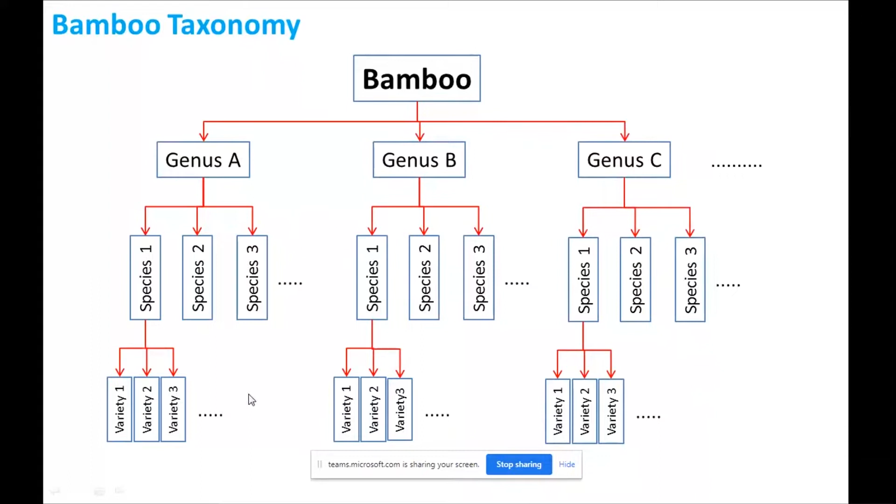About bamboo taxonomy, we start with bamboo, and after that we should say about the genus of the bamboo. After the genus, we should talk about the species of bamboo and the variety. For example, the family of bamboo is the Poaceae Gramineae. Genus can be Dendrocalamus, Phyllostachys, Bambusa, and many other genera that we have.

About the species, for genus Dendrocalamus, species can be Giganteus, Asper, Strictus, Latiflorus, and for Phyllostachys: Edulis, Aurea, Nigra, and many others.

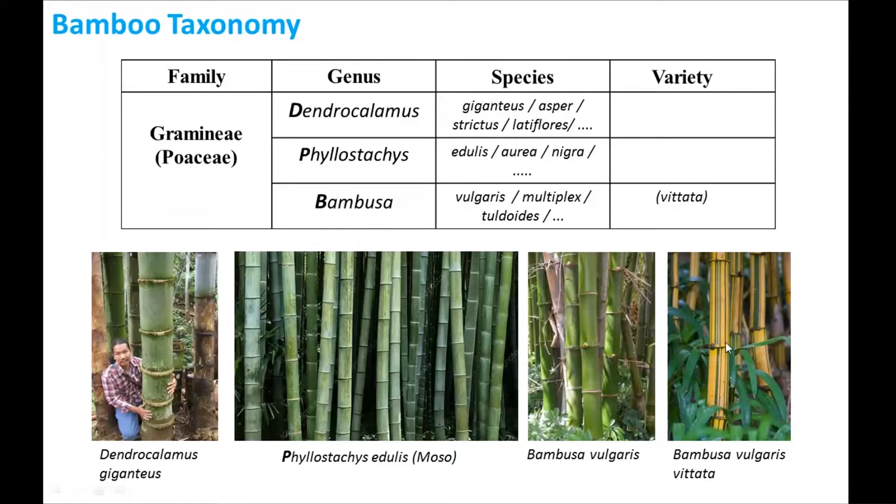For example, for the genus Bambusa, we have Vulgaris, Multiplex, Tuldoides, and many different species, and we have the variety Vittata. For example, we have Bambusa vulgaris, and exactly the same as Bambusa vulgaris, we have Bambusa vulgaris Vittata, because it has, in the yellow background, green lines like a barcode. It's a very beautiful bamboo.

About important specifications of bamboo: one of the most important is the high growth rate, in some species up to 1 meter per day. But normally it's not for all types of bamboo - only some species have this growth rate, and most of them grow about 20 to 30 centimeters per day.

The tensile strength of bamboo is comparable to steel, but the density is one-tenth. It's very important because it's a very light material, but the resistance is very high. The production cost is much lower than that of conventional materials, for example concrete and steel.

Propagation through the rhizome, as a root underground, propagates easily. You don't need cultivation - it automatically grows and grows without any problem. And it's prevention of soil erosion due to the formation of the roots and rhizome network that we have underground.

It's very good. Another good aspect of bamboo is the workability - you can use it and change it into many different shapes very easily with minimum tools and equipment.

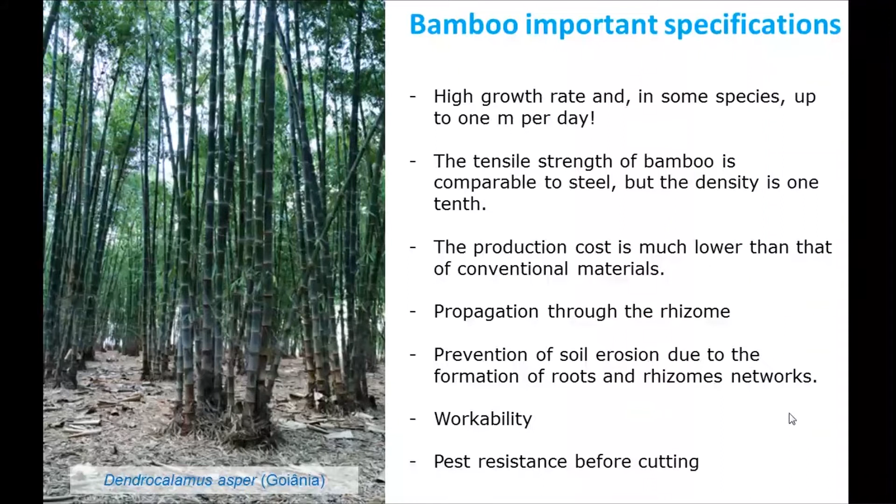Bamboo is a good material because it has pest resistance before cutting, but after cutting you need to preserve it and treat it against insects and fungus.

The good conditions for growing bamboo are normally tropical and subtropical zones, between 38 degrees north and south. You should consider there should be no severe cold and icy weather, because you cannot grow it in Finland or Norway, but you can grow it in the south of Europe without any problem. Also, acceptable relative humidity for this plant is more than 30 or 40%, which is good for bamboo.

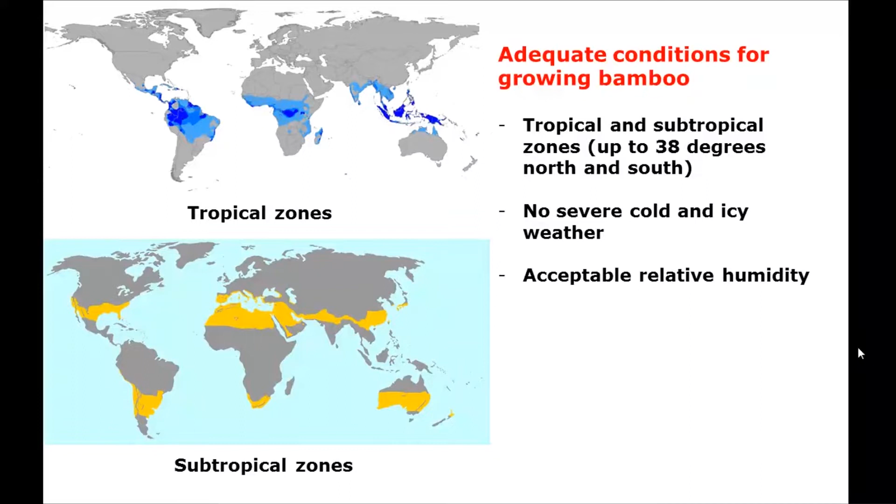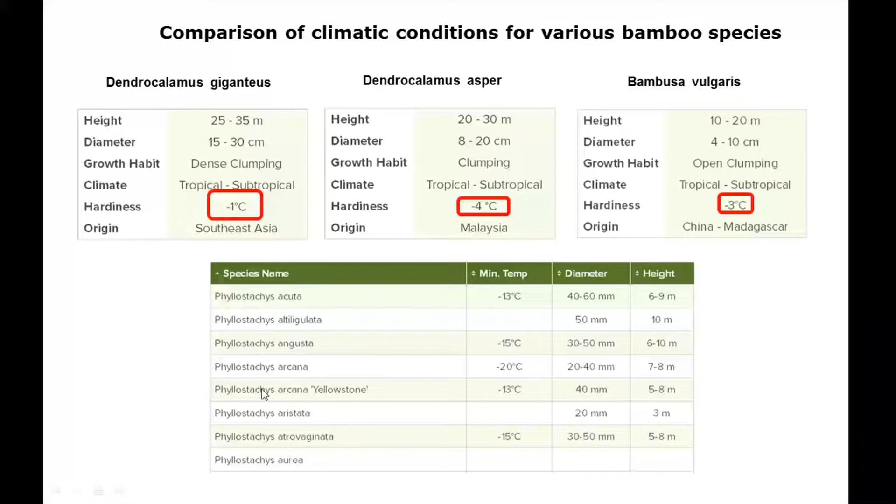Here you can compare the climatic conditions for various bamboo species. For example, Dendrocalamus giganteus: the height is about 25 to 35 meters, diameter between 15 to 30 centimeters, and the hardiness is -1 degree. For Dendrocalamus asper, it's -4, which is better and can tolerate cold weather. Bambusa vulgaris is -3. You can compare the size, diameter, height, and minimum temperature tolerance for different types of bamboo. We also have species tolerating up to -20 degrees, for example Phyllostachys arcana.

For distribution and diversity of bamboo in Asia, China has the highest diversity, followed by India, then Vietnam. Japan and Korea have bamboo too, with Japan's situation being better. Indonesia and Malaysia also have bamboo only in certain regions.

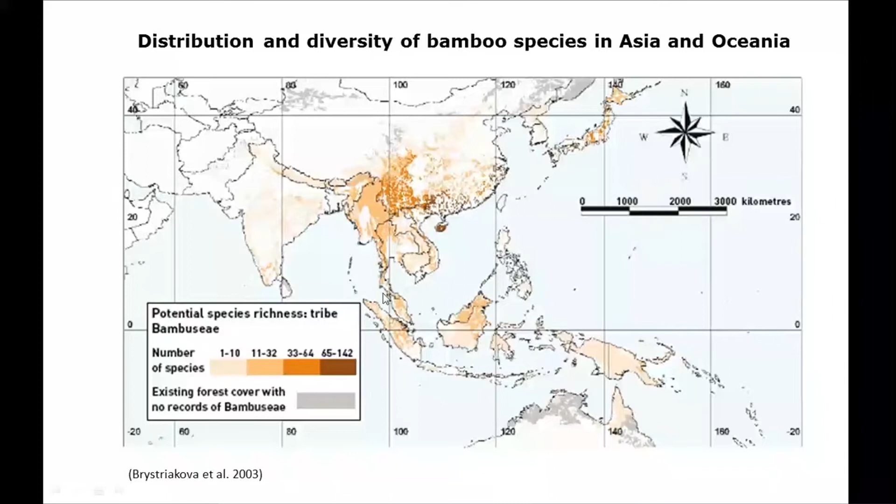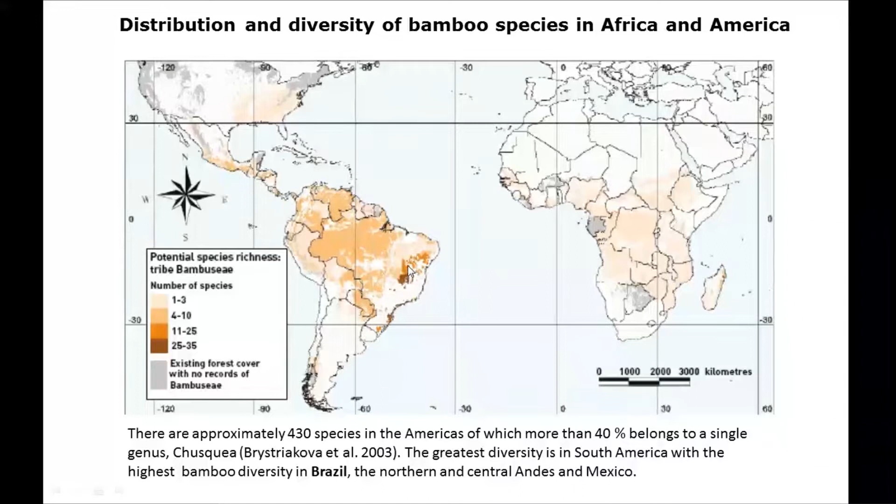In Africa and America, bamboo is more concentrated in South America. In this region where we are now, in Brazil, you can see the high diversity.

Now we talk about the bamboo structure and geometric features. We cut the bamboo here inside the university, taking a section of Dendrocalamus giganteus.

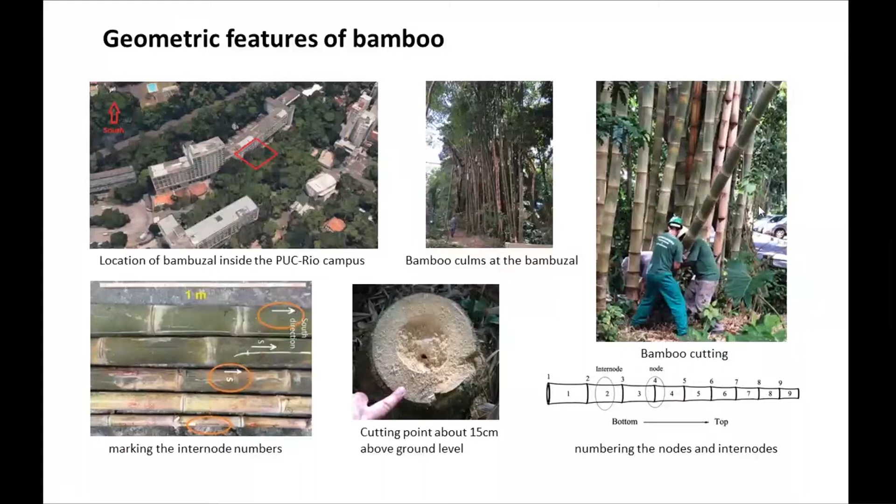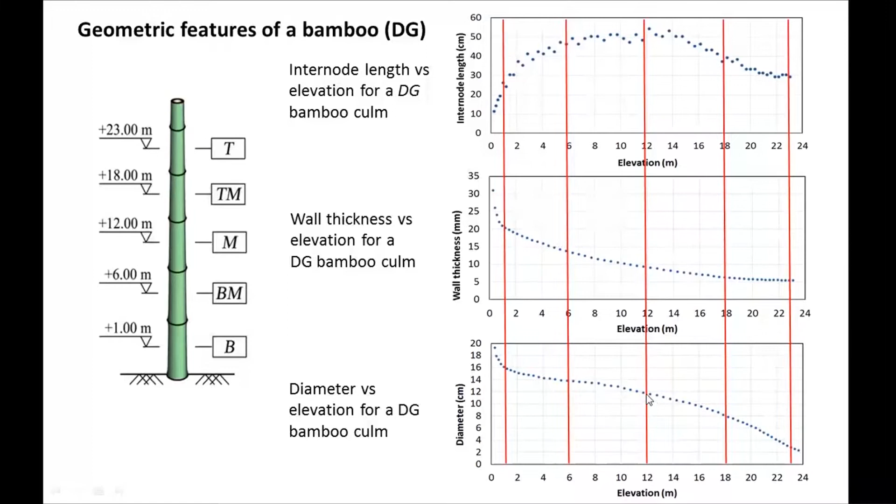After cutting, we measured all the dimensions: wall thickness, diameters, and the distance between the knots. For the results, the wall thickness started from 30 millimeters, averaging 2 centimeters, and at elevation 12 you can see about 10 millimeters. The distance between internodes is about 50 centimeters, and the diameter is about 12 centimeters.

For the meso and microstructure of bamboo, after cutting a bamboo section, you can see a bamboo segment. This segment has 3 parts: one is the matrix or parenchyma, a porous part, and another is the sclerenchyma or fibers, which are responsible for the resistance of the bamboo.

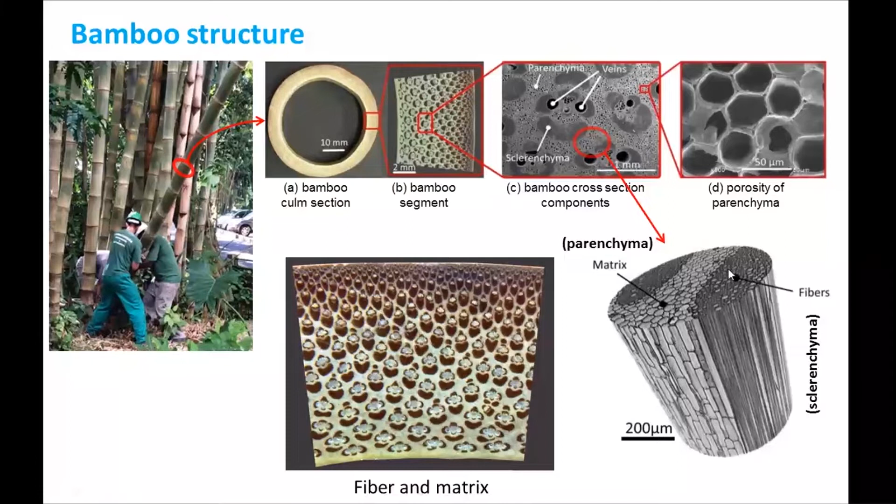We provided a tomography from a piece of bamboo, and you can see the porous matrix and the sclerenchyma or fibers, which are very dense, rigid, and solid. The matrix works only as a binder, exactly the same as reinforced concrete, where we have bars and a matrix which is concrete. The same happens in the cross section of bamboo: the fibers (sclerenchyma) are the bars, and the parenchyma acts as the matrix or binder. You can also see veins here, the hollow tubes for feeding the bamboo.

Here we can compare bamboo and wood. You can see the annual ring in wood, and you should consider that in a tree there is transverse growth, meaning each year the diameter of the tree becomes bigger and bigger. But for bamboo growth, it starts with its initial diameter. Comparing bamboo and wood, we can see the annual ring in wood, but we cannot see an annual ring in bamboo, and there is no transverse growth.

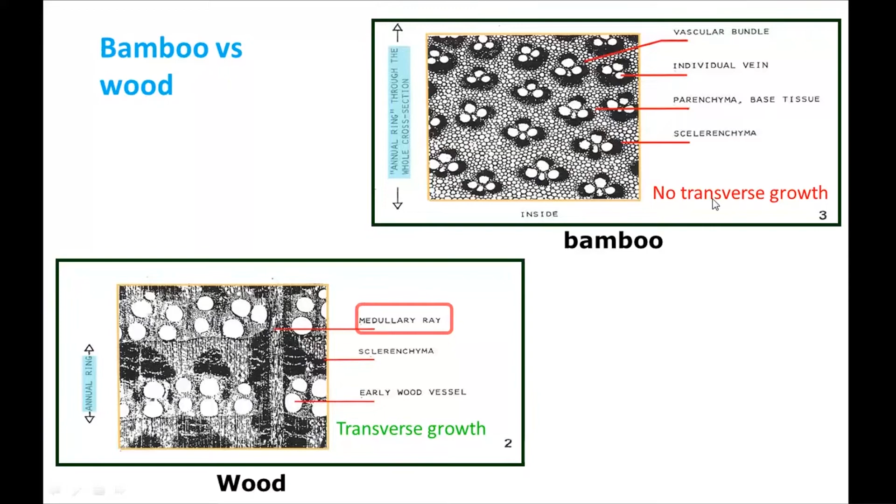You can see the Dendrocalamus giganteus and Phyllostachys edulis, and in the radial direction you can see the fibers. Here it's very dense, but in the bottom part of the bamboo, we don't have any density.

Here we can see exactly in the top of the bamboo, in the external wall, a high concentration of the fibers. In the lower or internal part of the bamboo, you can see matrix or parenchyma, and the density or concentration of the parenchyma is more. In Phyllostachys edulis also you can see the fibers and the matrix, with more density and concentration of fibers at the external part.

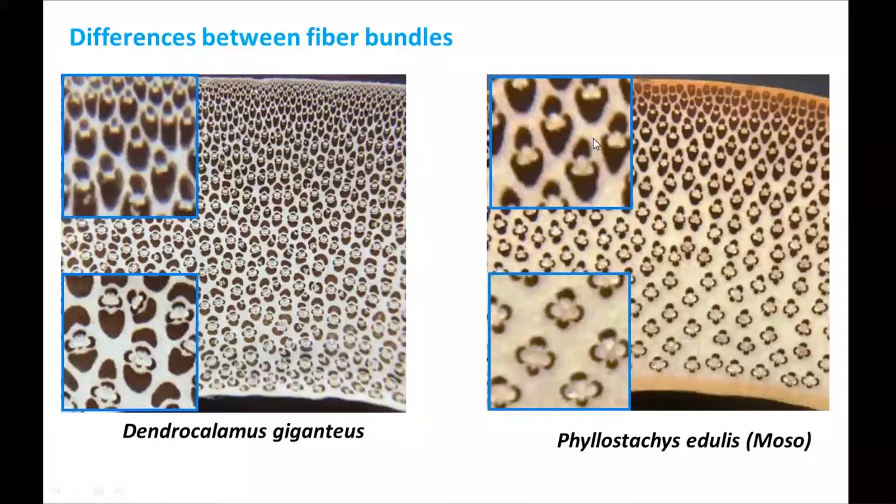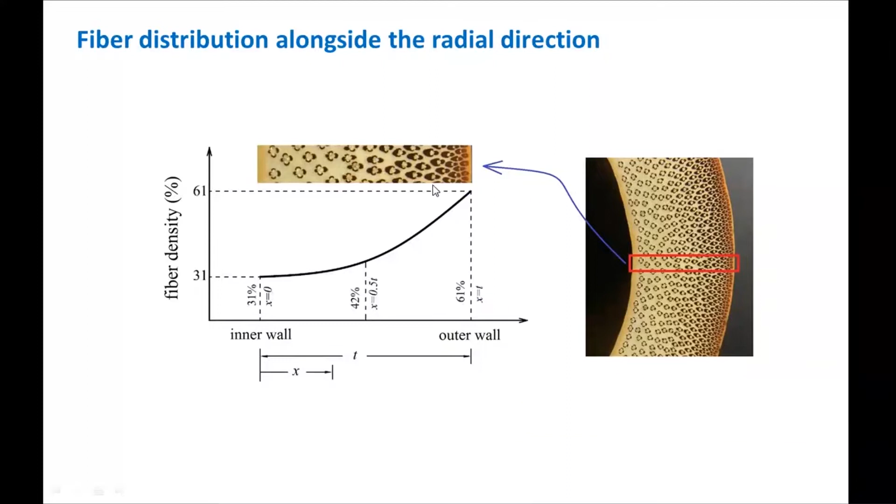You can see from the internal wall to the external wall that the most concentration is in the external wall, and the minimum concentration of fibers is in the inner wall. For example, 31% at the inner layer and 61% at the outer layer. This is a schematic graph presenting this. Yes, this is bamboo as a functionally graded material.

In a functionally graded material, or FGM, the property changes gradually with position. This is a gradual change from one component to another along a special direction, which you can see in the radial direction. Component A gradually becomes component B, and you can see exactly that happening here.

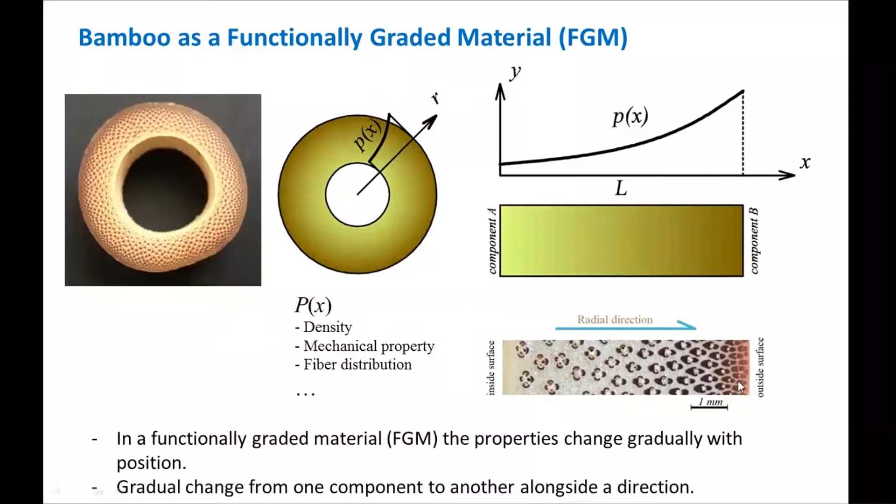You have more matrix here and less fiber, and here you can see more fibers and less matrix or parenchyma. The chemical components of bamboo are mainly cellulose, hemicellulose, lignin, and extractives.

The extractives are the aromas, resin, starch, oil, and many different substances that you can extract from the bamboo. You can maybe use some solvents like water, alcohol, or acetone or other materials to extract these aromas.

But extracting the lignin, hemicellulose, or cellulose needs other, more complicated chemical processes. And you should know about cellulose.

Cellulose has remarkable mechanical properties. The modulus of elasticity is about 120 or 140 gigapascals - it's excellent. That's the modulus of elasticity. And the ultimate tensile strength is about 1,000 megapascals, which is 2 or 3 times more than steel.

But hemicellulose is not as resistant as cellulose, and neither is lignin. The hemicellulose and lignin can only be used as a binder in the structure of the bamboo.

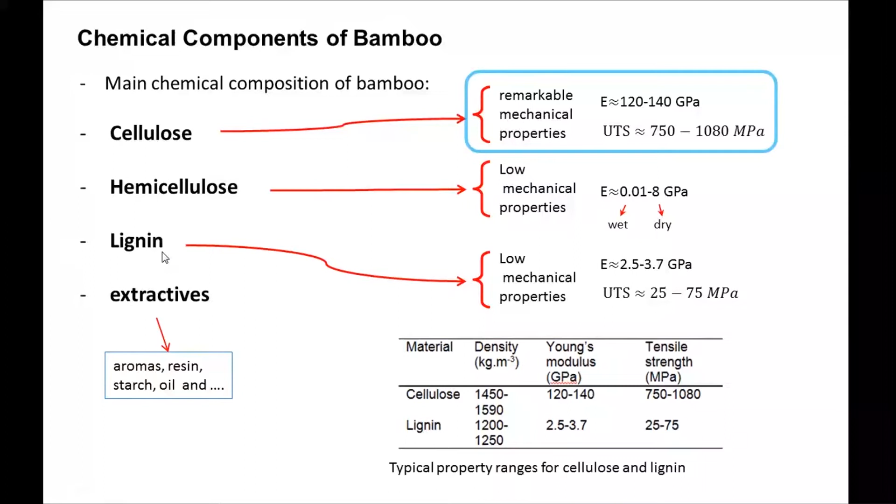We can compare bamboo with different types of hardwood and softwood. We have softwood, something like pine, and hardwood, for example maple - we also have balsa, maple, walnut, and eucalyptus. The only real difference you can see when comparing bamboo with hardwood and softwood is that bamboo is very close to hardwood. You can compare this because of the lignin component: it's between 13 and 29% for bamboo, and 15 up to 25% for hardwood. But softwood has much more lignin than hardwood and bamboo.

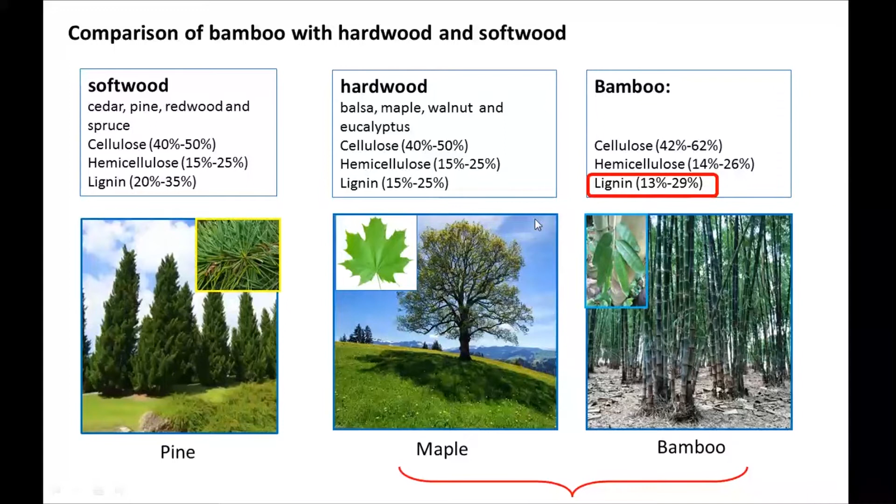In engineering, when you compare bamboo with other materials, four important materials used for construction are steel, concrete, wood, and bamboo. You can see that to produce 1 cubic meter of steel, you need about 1,500 megajoules of energy, but for bamboo it's only about 30 - a 50 times difference between producing steel and bamboo.

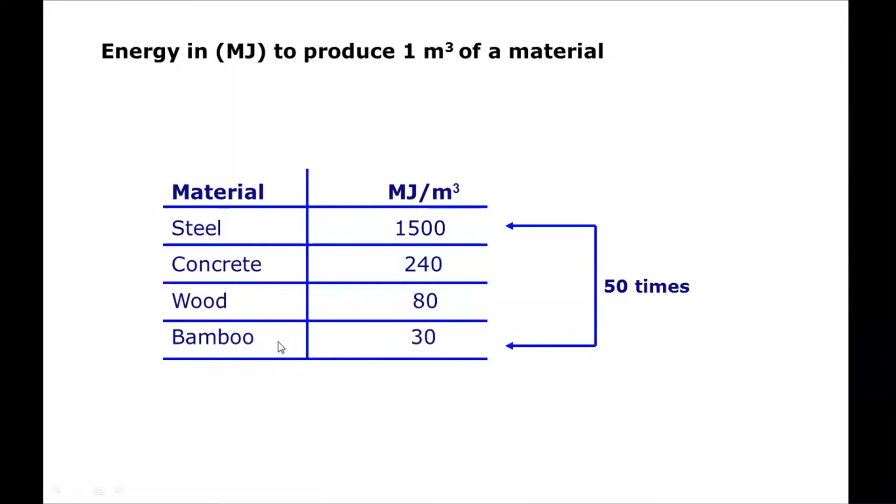For wood, the numbers are closer, but still, bamboo is better than wood.

If you want to compare the strength and resistance, the young modulus of some plant materials with bamboo, you can first see the cellulose here. The cellulose is in the best situation related to the young modulus, and related to the strength. We have lignin here, which is a poor situation because it has less young modulus and less strength.

We saw cellulose strength was about 1000 megapascal. You have these two strips here, showing that bamboo's young modulus varies between 6 gigapascal to 25 gigapascal on average. We have many different species of bamboo, so it can vary, but in average we can consider between 6 and 25 gigapascal. For strength, we can consider 60 megapascal up to 250 megapascal - 250 for the tensile test, and 60 for the compression test, which I will explain. You can see the good situation of bamboo compared to other types of wood in these regions.

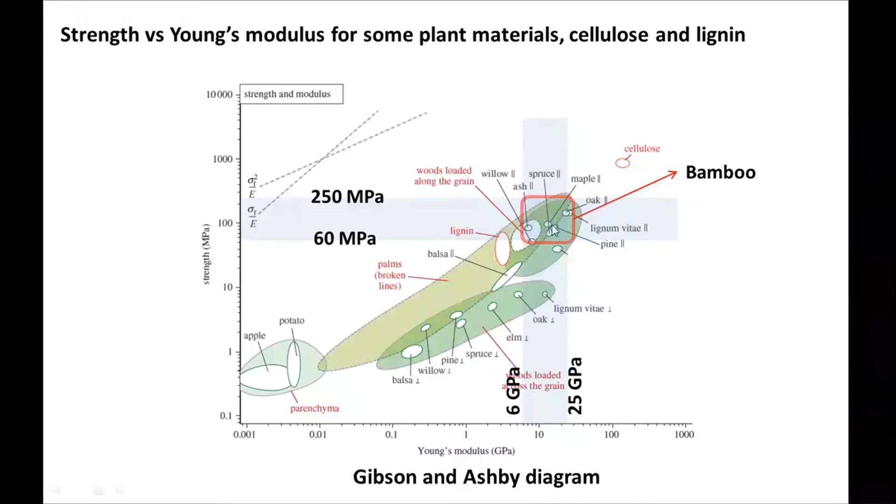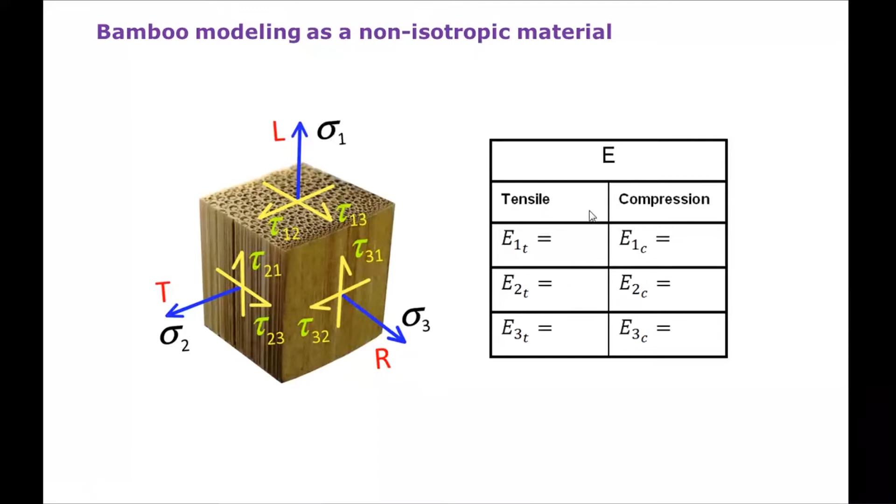If you want to model bamboo with software like Abaqus or ANSYS, you should consider that bamboo is not an isotropic material. It's a non-isotropic material, meaning you should consider different Poisson ratios and different modulus of elasticity in each direction - longitudinal, tangential, and radial. Also, the module of elasticity differs between tensile and compression. It's interesting, but very difficult to model bamboo with software considering all of these aspects.

Now we talk about engineered bamboo. We can use bamboo as a whole - for example, a bamboo column as a column of the structure, or as a beam, a member of the structure, the entire bamboo in fact. But you can also use some products made from the bamboo.

For example, you can make a laminate with undensified or densified bamboo. With glue, you can make a glue laminate, like the glue lamination we have for wood. You glue some laminate bamboos together, and with pressure or higher pressure, with or without densification, you get bamboo laminate used for flooring. You can also make bamboo strips, place them inside resin, and with compression and heat together, create a bamboo scrimber.

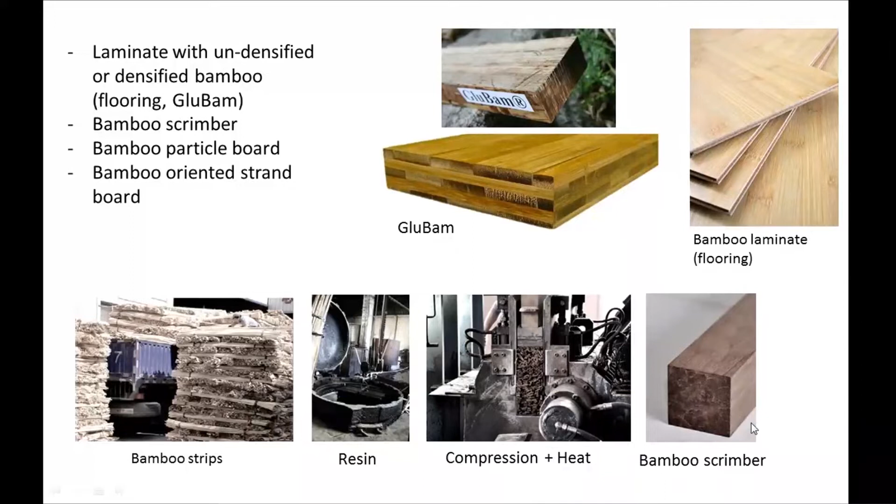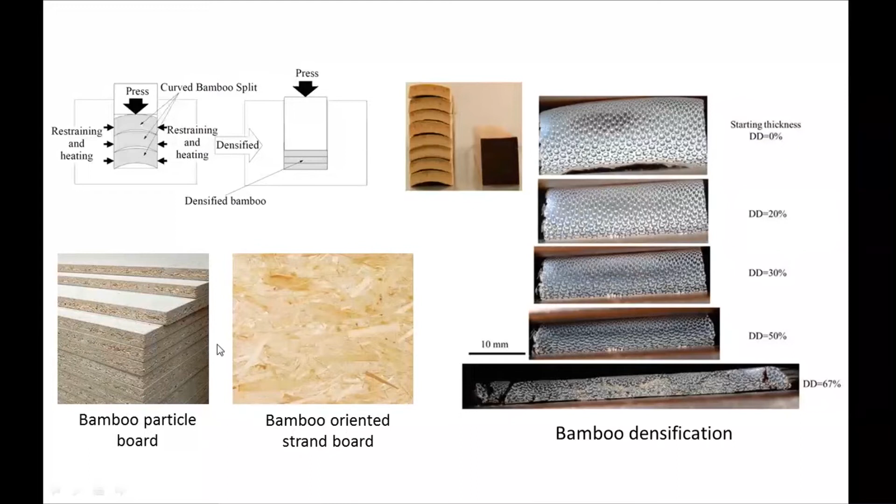You put pieces of bamboo together, and with pressure and heat, you densify it. This is a densification process - starting at 20% densification, then 30%, 50%, and finally up to 67%. As you remember, bamboo has a lot of porosity, and you can compress all of that porosity. You can also see bamboo particle board and bamboo oriented strand board - two other products made originally from bamboo.

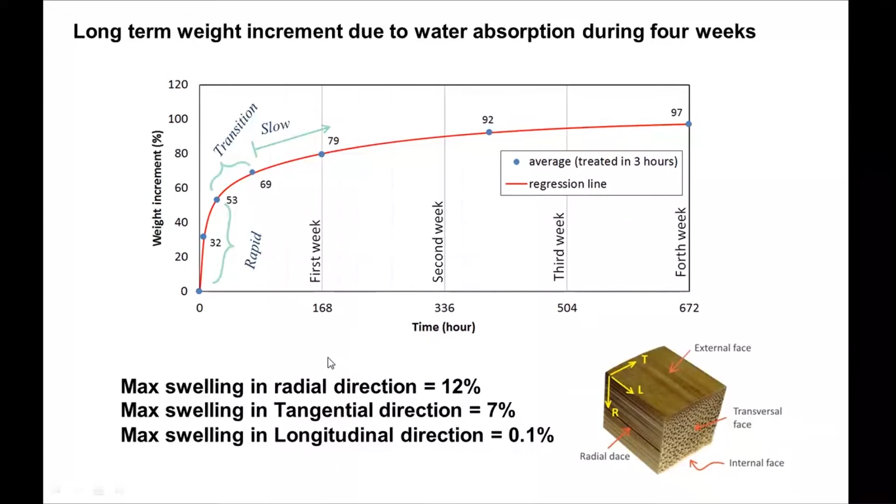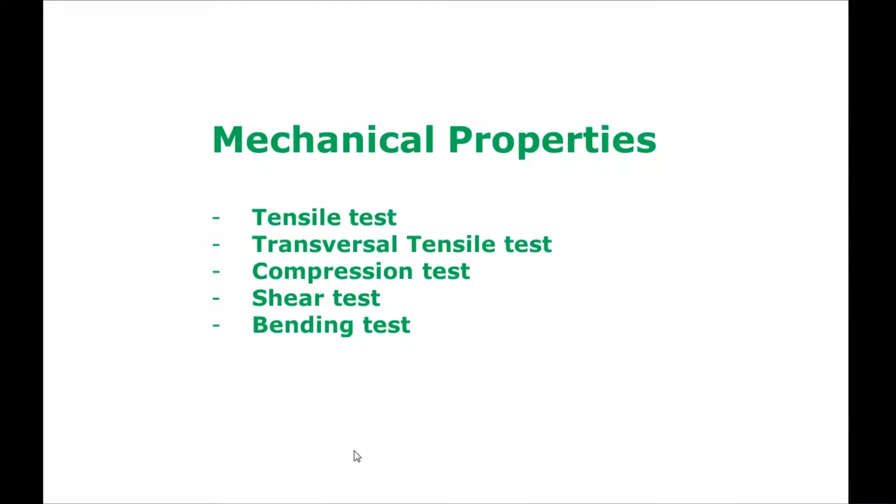About mechanical properties, we should talk about the tensile test, transversal tensile test, compression test, shear test, and bending test. In the tensile test we performed in the laboratory, we found that the ultimate tensile strength on average for bamboo is about 250 megapascals, though the exact values differ for T1, T2, T3 in each dimension, with the CV shown. The average E is about 22 gigapascal, and you can see the average and CV of this test - it's very close, a very low CV, which is very acceptable, meaning the test is very acceptable.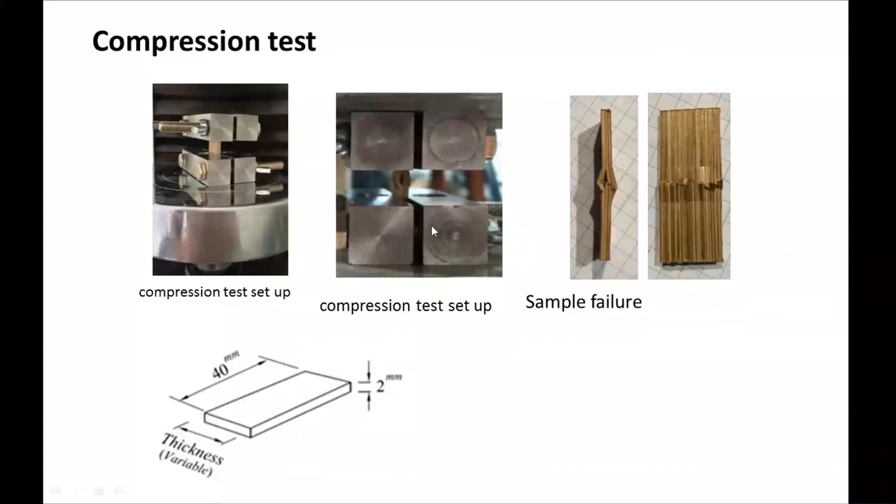In the compression test, dry and humid samples are totally different. For the humid samples at equilibrium moisture content of about 10%, you can see about 60 megapascal. But if you dry the sample, you can see 152 megapascal.

This can be justified due to the buckling of the fiber inside the matrix and the relation of the volume fraction of the fiber and the shear modulus of the matrix. You can see the effect of the modulus of elasticity of the matrix and the fiber, and the volume fraction of the fiber. With humidity, we have less EM, less EF, and less shear modulus of the matrix.

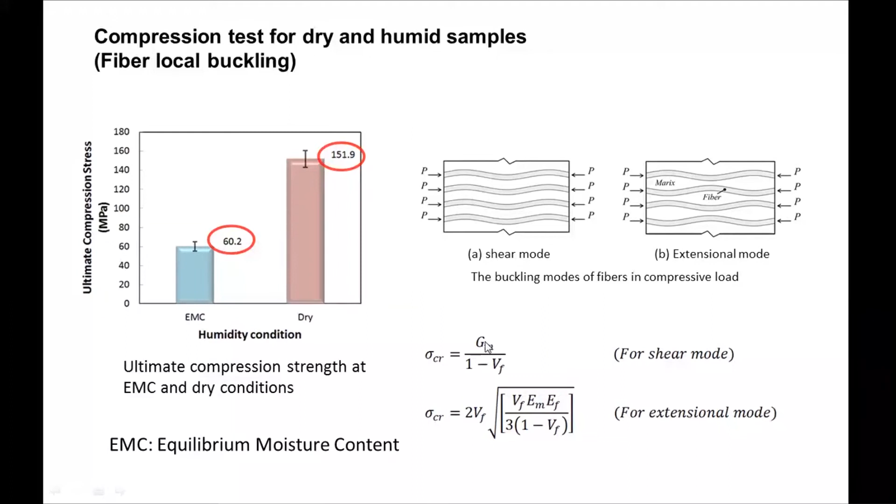The shear test normally can be done with different types. For example, we can use ASTM D143 for blocks of wood. It's very usual, it's the apparatus you can see, used everywhere for measuring the shear of wood blocks.

But as our geometry is very limited and we cannot make blocks of bamboo because of the limitation of the wall thickness, we use another method proposed by ISO 22157. You put the sample like that, with 2x here and x here, and you can have 4 shear surfaces in 4 different locations to measure the shear resistance of the bamboo.

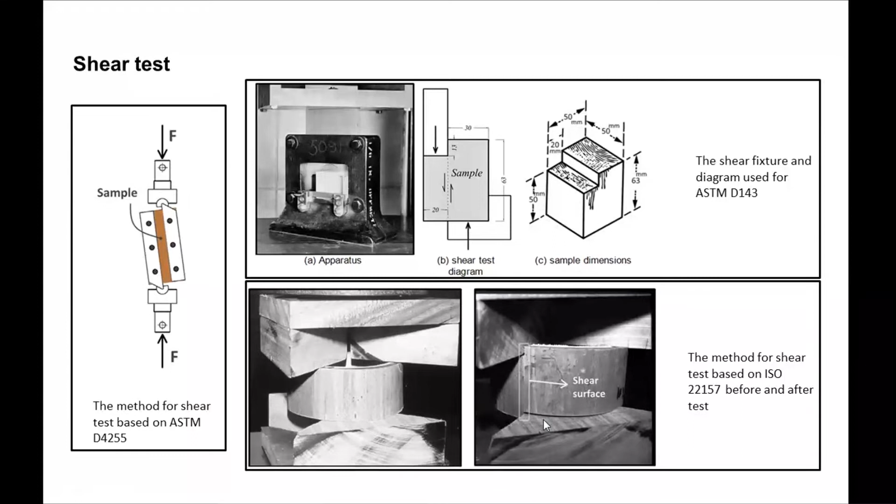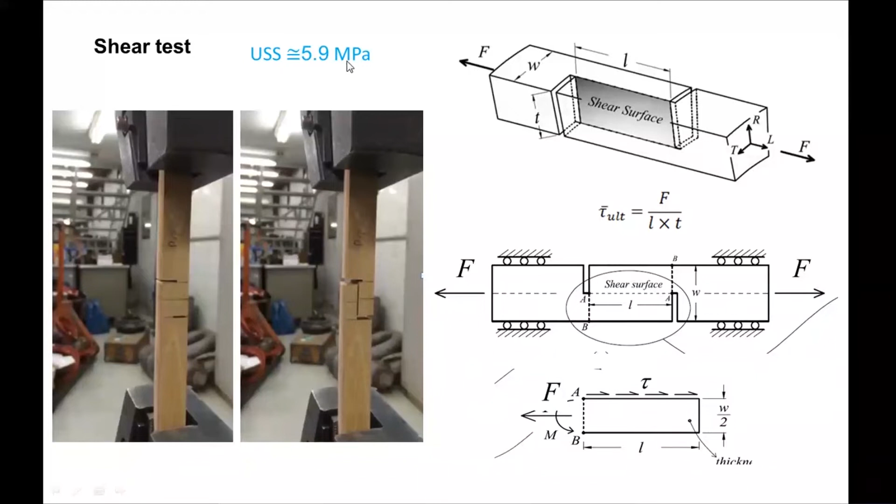We propose another way, using 2 notches here and here, giving us a shear surface here. With this shear test, we can realize 5.9 megapascal for these samples.

We have a 4-point bending test, and we can understand that the modulus of elasticity is about 20 gigapascal. You can see the failure shapes of the samples with low wall thickness and with high wall thickness. We can see shear failure happen for the samples, with different types of failures.

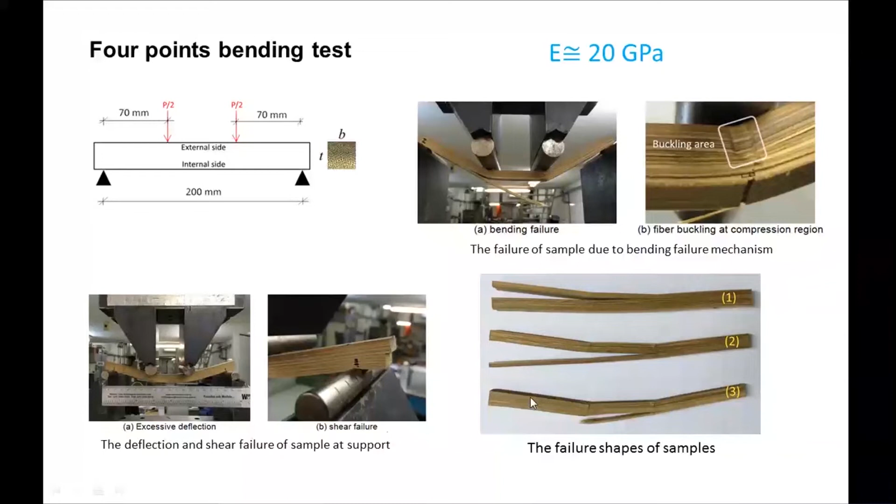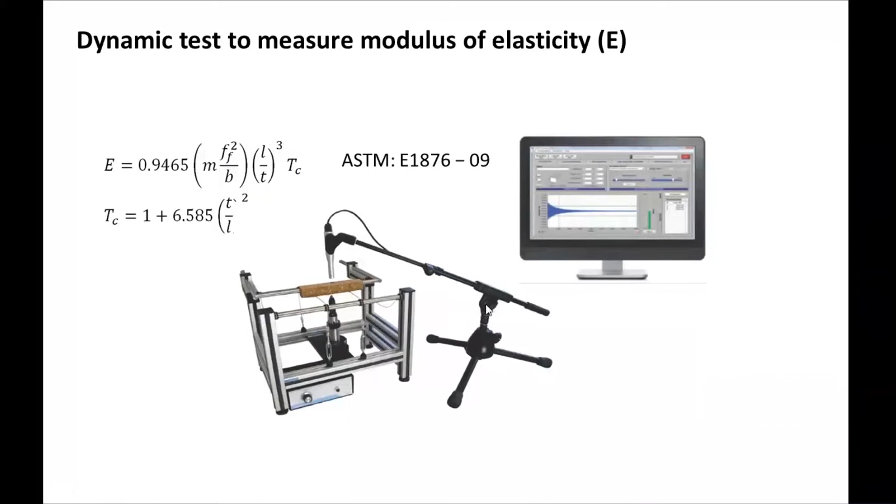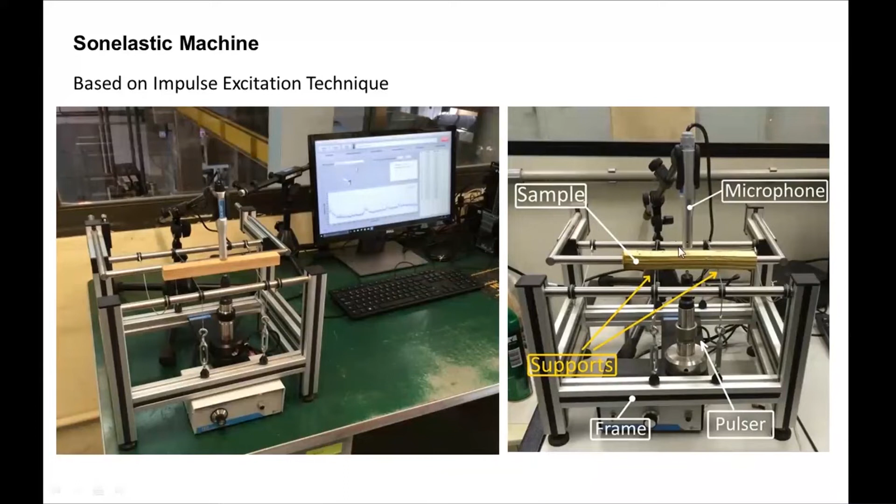We can also use the dynamic test to measure the modulus of elasticity. It's a Sonelastic equipment made in Brazil, developed with a professor here, used to measure the mechanical modulus of elasticity based on the impulse excitation technique. The sample vibrates, the sound produced by the sample is recorded by the microphone, and after analysis, you can understand the mechanical property of the sample.

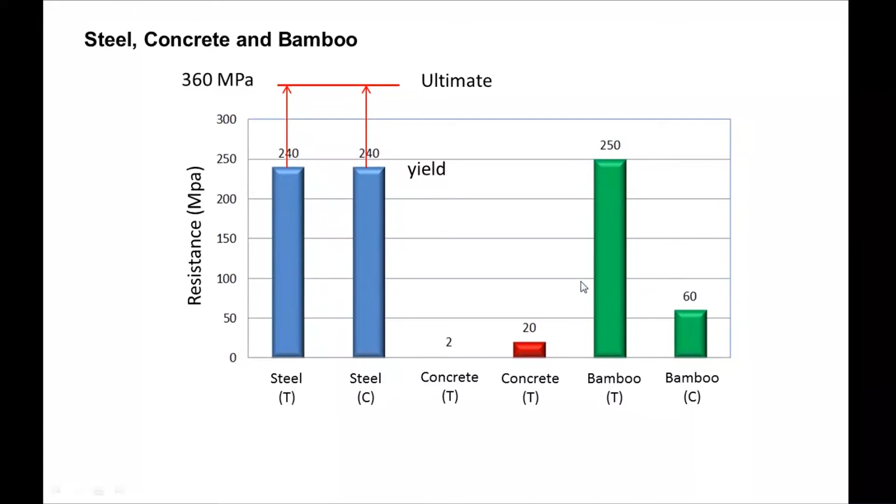If you want to compare steel, concrete, and bamboo rapidly in one graph, you can understand that for steel, tensile and compression are equal. For steel used in construction, it's 240 megapascal, and the ultimate is 360 megapascal. For concrete tensile, it's very, very low; for concrete compression, it's 20. For bamboo tensile, we have 250, and for bamboo compression it's about 60. It's a relatively good situation compared to concrete and steel.

Bamboo protection: we have two main different bamboo protection methods. One is heat treatment with direct flame. By using the flame, you can burn the starch and sugar inside the bamboo, because the starch amount in bamboo is relatively high, and by caramelizing this sugar, you can protect it easily.

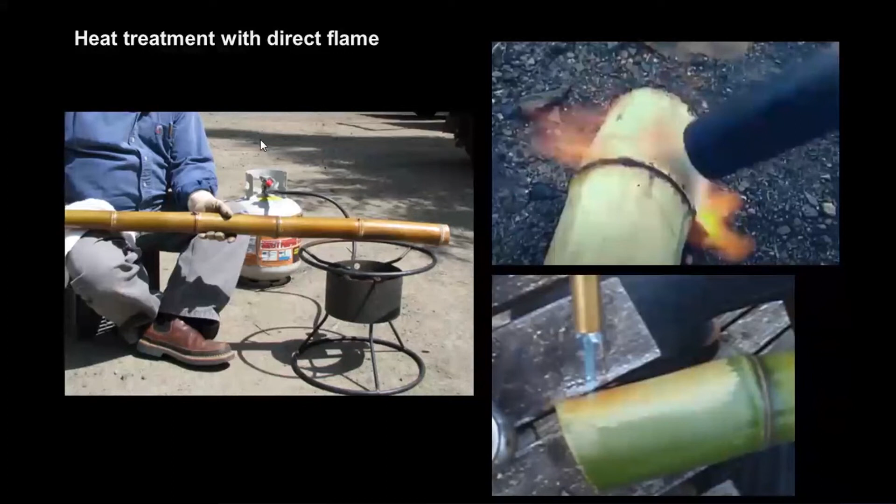The other way is using chemical treatment, immersion in chemical solutions like DOT, or disodium octaborate tetrahydrate solution, which is a mixture of borax and boric acid in special proportions. You can immerse it for 1 week, and after drying, you can use it easily without any problem from insects or other attacks.

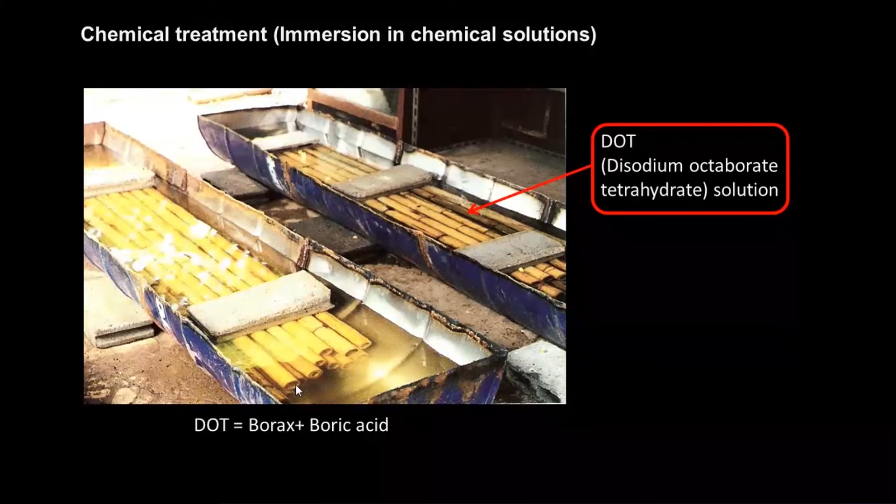Now we talk about the bamboo connections. The world of the bamboo connections is very diverse, because we have many different bamboo connections in the world. Every person uses some and maybe invents a new way to connect bamboo.

And we have another connection here with bars and metal anchor, and the technique. We use different positions, vertical and horizontal, and we can fasten the screw and tighten the two parts of bamboo.

We can join two bamboo with two belts and nut and bolts here, and you can fill here with, for example, a matrix, something like light concrete, and use two straps or belts and nut and bolt to fasten different parts of bamboo as a column or beam or everything.

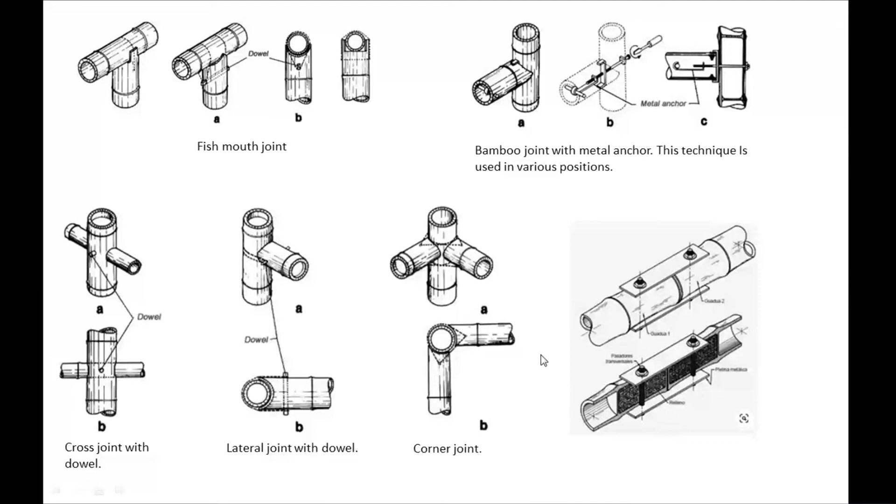We can use some ropes for fastening the bamboo, and you can see here a space truss with some particles, some steel bars and something like that.

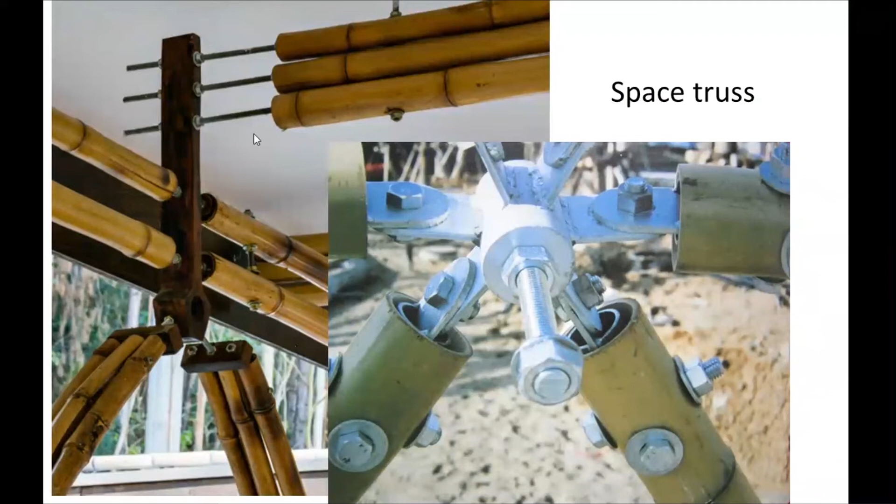And you can see the bamboo joints with steel clamps. It's capable of transmitting moment, and you can see here exactly that you have steel clamps, and this part is used for rigidifying this part.

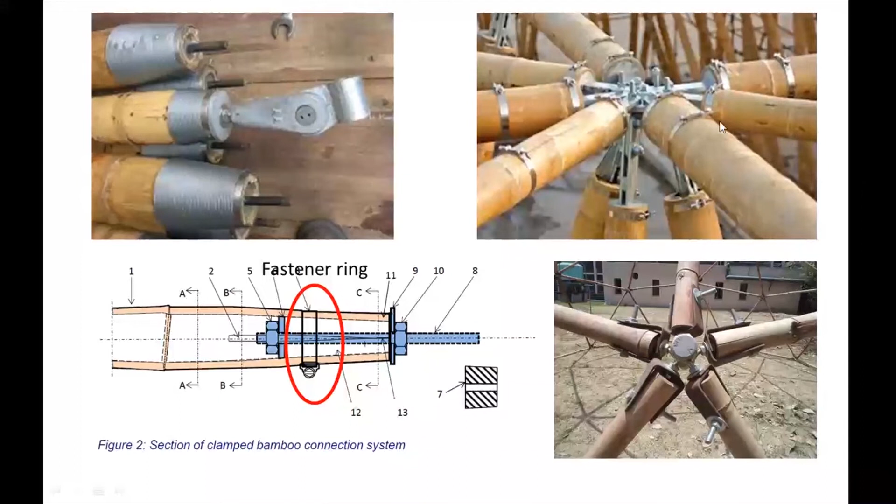We have another type of fastener ring, and it's a bar with a pulley here, and it's a detail for fastening different types of columns or other things together.

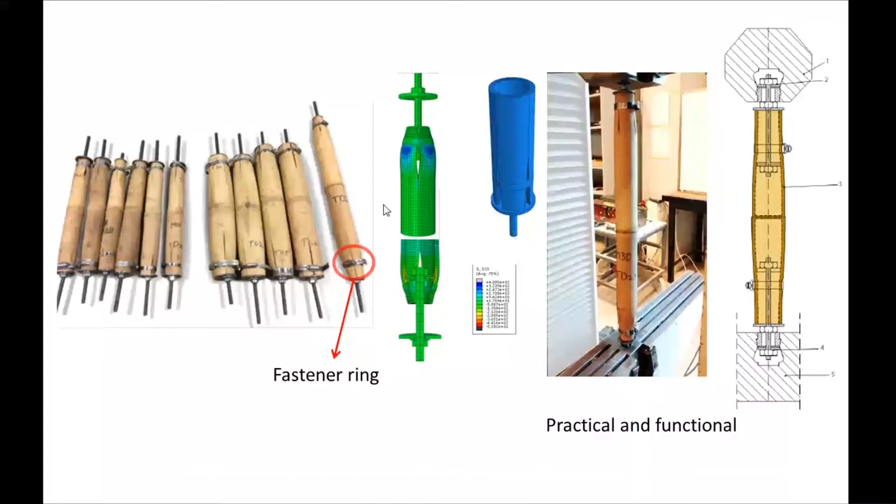You can see here many details, and you can find in the internet many different types of bamboo connections.

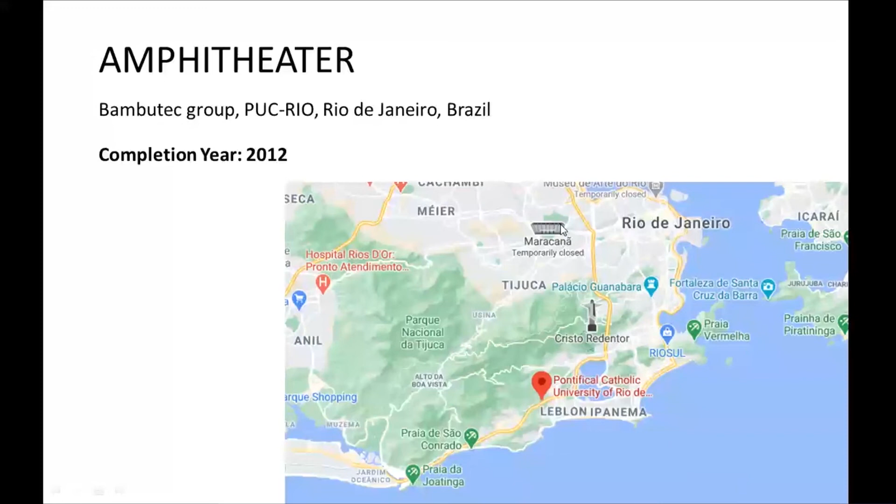Here, and you can see the Cristo aqui, Maracana. It's a very nice city, very beautiful city, Rio de Janeiro.

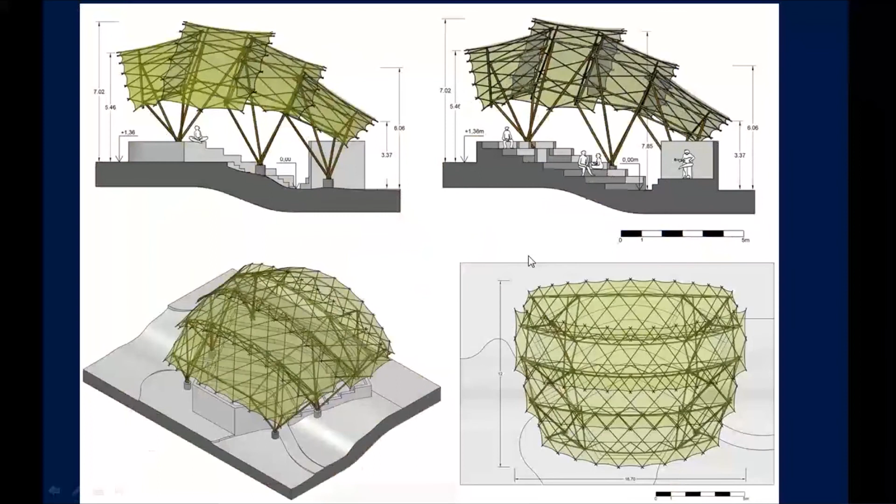You can see the schematic design of the amphitheater here, and finally you can see it in a real situation.

You can see the connections, you can see the size of this structure, and also on the right side you can see the bamboo, Bambusa vulgaris, that we have many of in Rio de Janeiro.

The inside part of this structure, and you can see the connections here. All of the connections use rope for fastening the bamboo together.

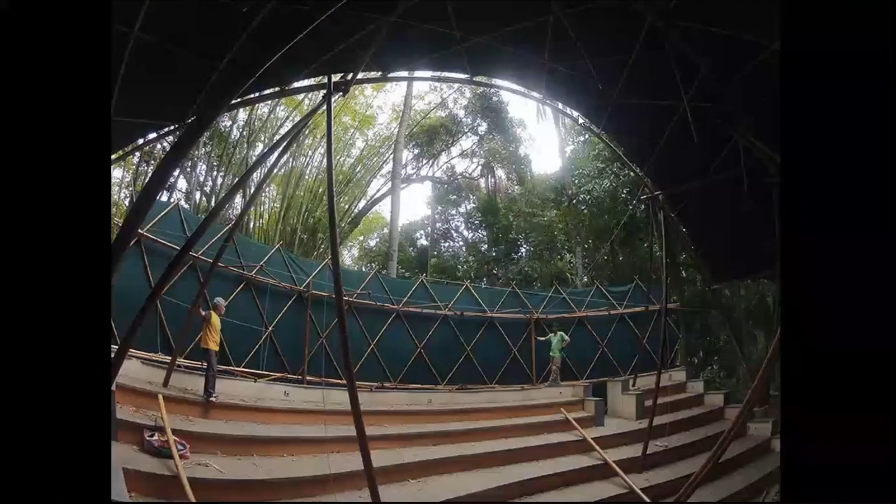You should consider that they also use steel cables here for the tension parts, because it's compression and tension. The role of the bamboo here is mostly in compression, and the columns are in compression. For the tension, they use the steel cable, a mixture of steel cables and bamboo. You can see it with more details here.

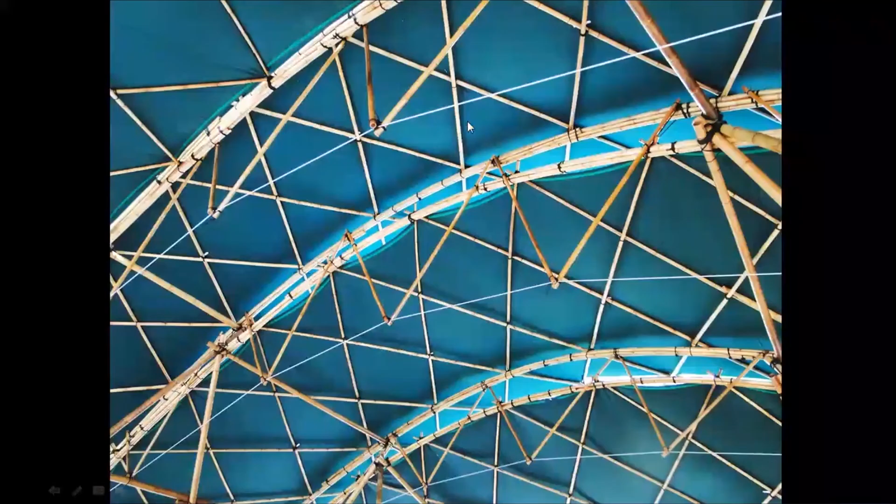Another frame is very close, I don't want to repeat, because it's another work by the Bambutec Group. They used two different types of bamboo, Phyllostachys aurea and Phyllostachys edulis, or moso bamboo.

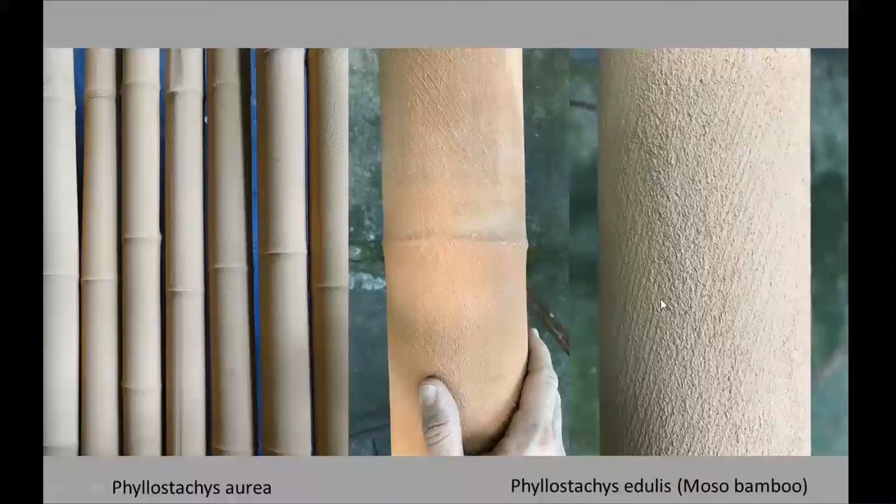Moso bamboo has a diameter larger than Phyllostachys aurea. Aurea is used for the subsidiary or secondary elements, and for the principal or initial elements, they use Phyllostachys edulis. It's from the Bambutec Group, and it's the Bambutec site.

You can go there and see other structures made by them. It's a group, a very nice group, with Mario Seixas, my best friend.

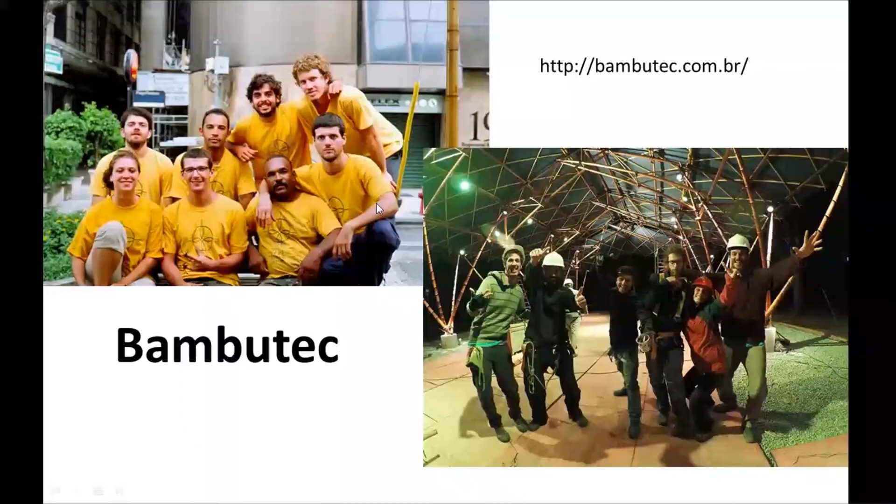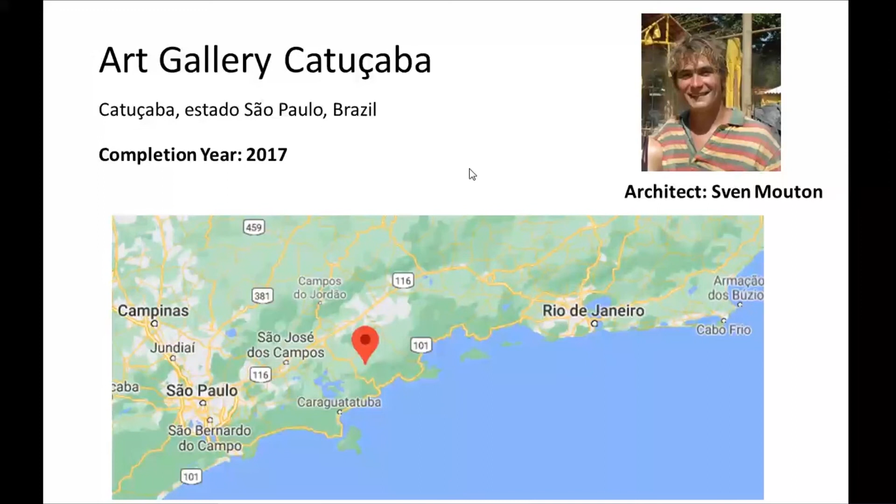You can see the art gallery made by architect Sven Mouton from Belgium, but he worked in Brazil many times. He traveled and stayed here in Brazil and made many different bamboo structures that I will present two of. One is the bamboo gallery, which is very beautifully designed, and you can see the design.

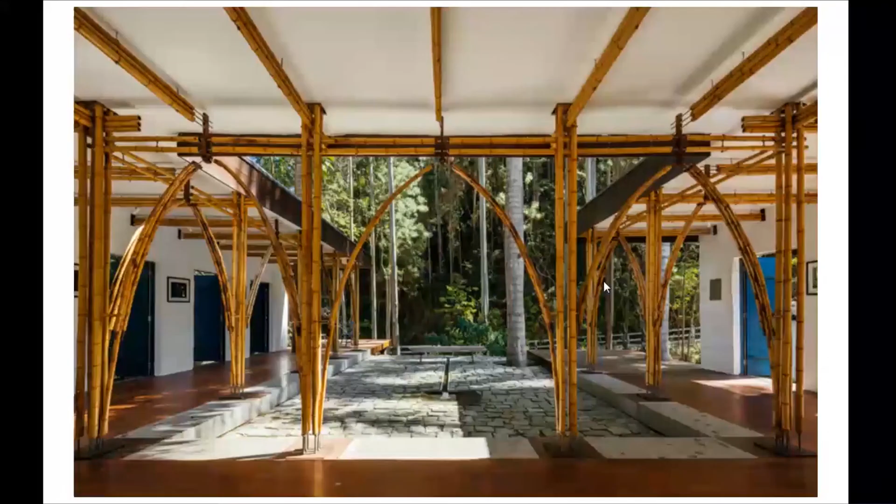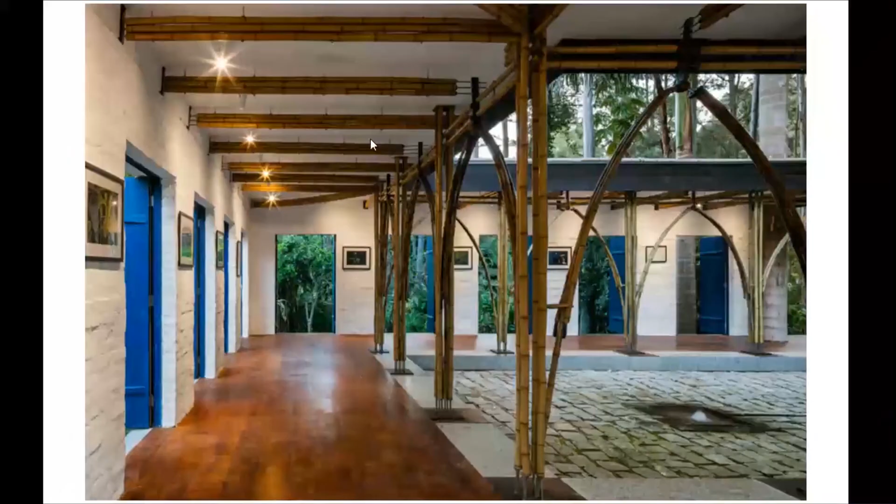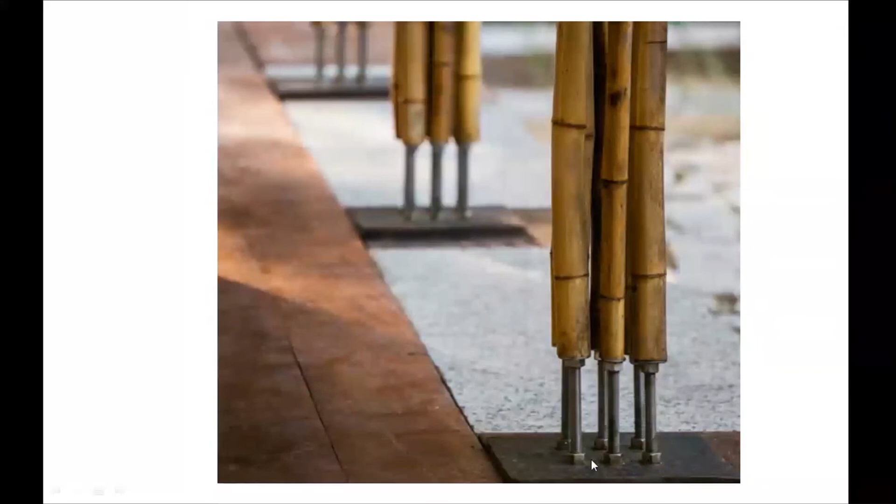And you can see the foundation, this plate, and it's a good idea because it's not directly in contact with soil, because it's better suggested that you don't put bamboo directly in the soil because of the degradation of the bamboo.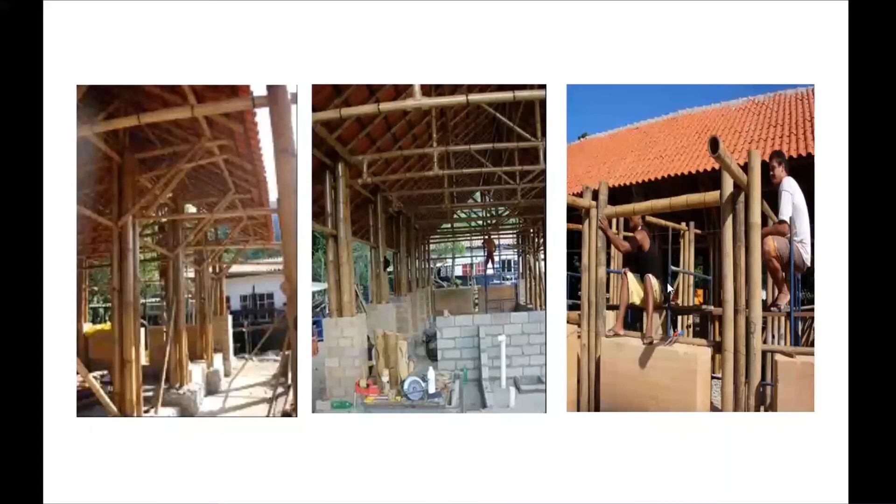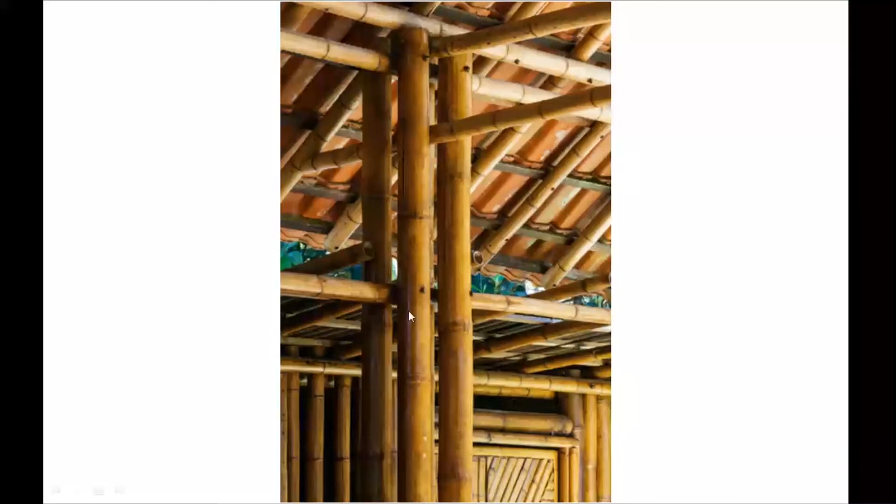And you can see the structure of bamboo here, and the columns. Most of the bamboo here is used as columns. Each group of columns has 4 bamboo.

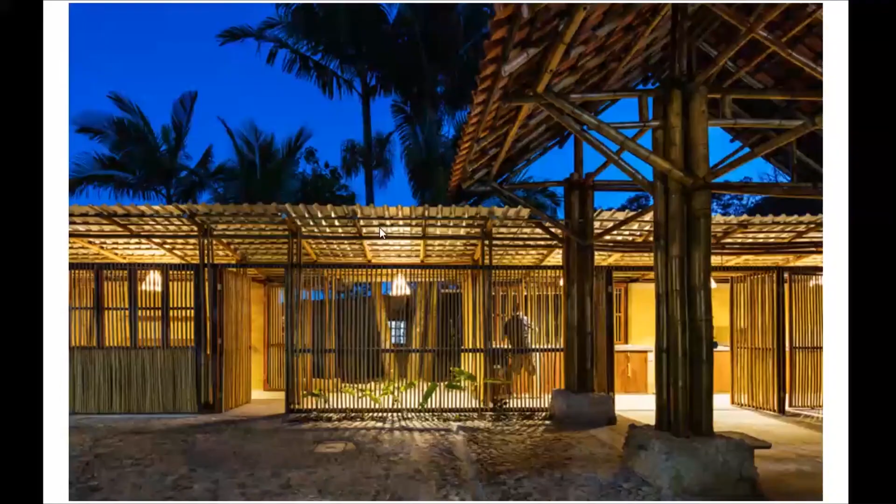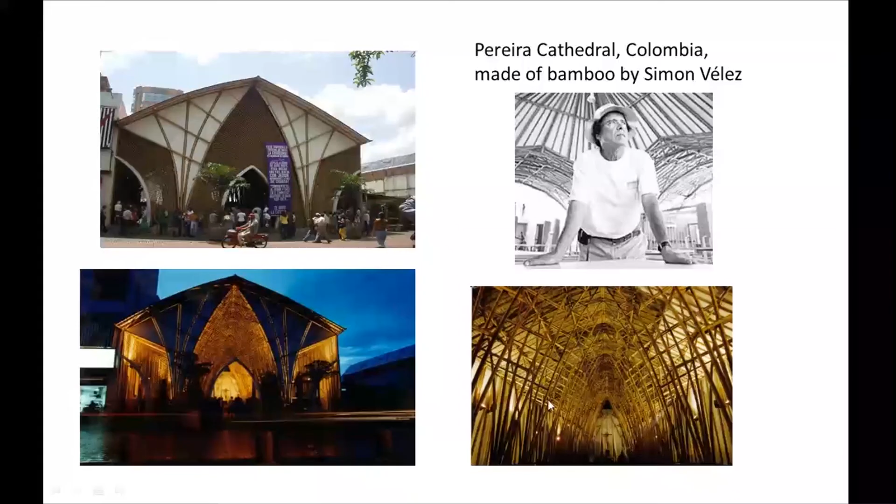Another example, from Colombia, designed by Maestro Simon Vélez, a great architect who designed, for example, the Pereira Cathedral in Colombia. You can see the very beautiful and nice structure here inside. Very nice and very beautiful.

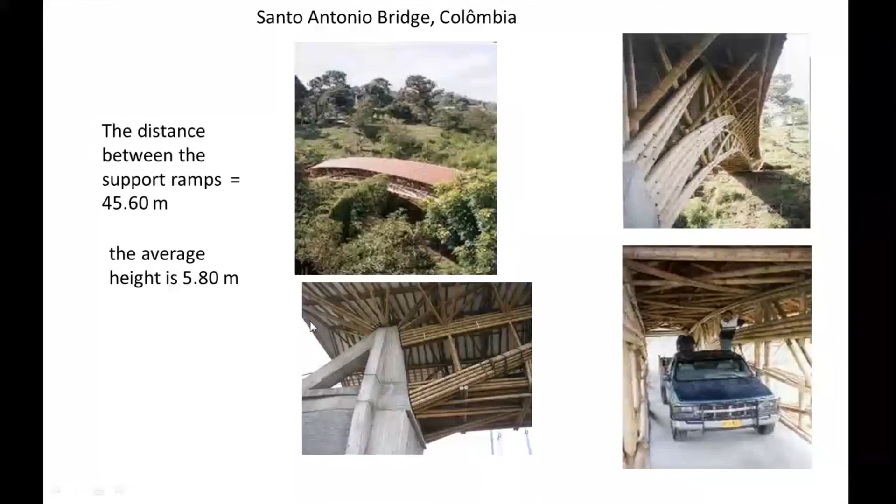Another type of design, very interesting, with the bamboo in the jungle. You can see different types of design here also.

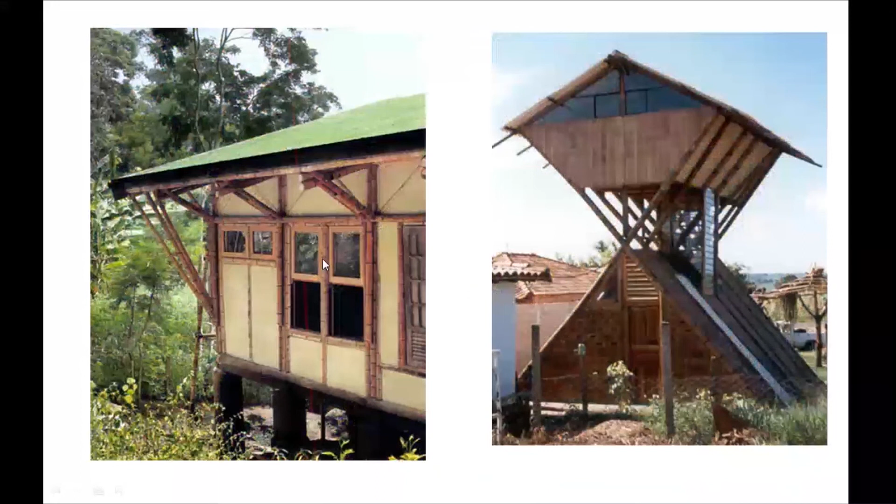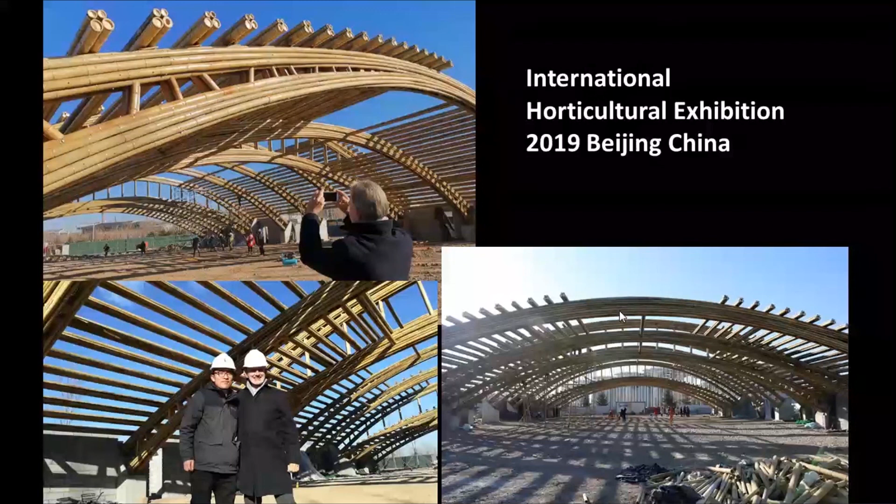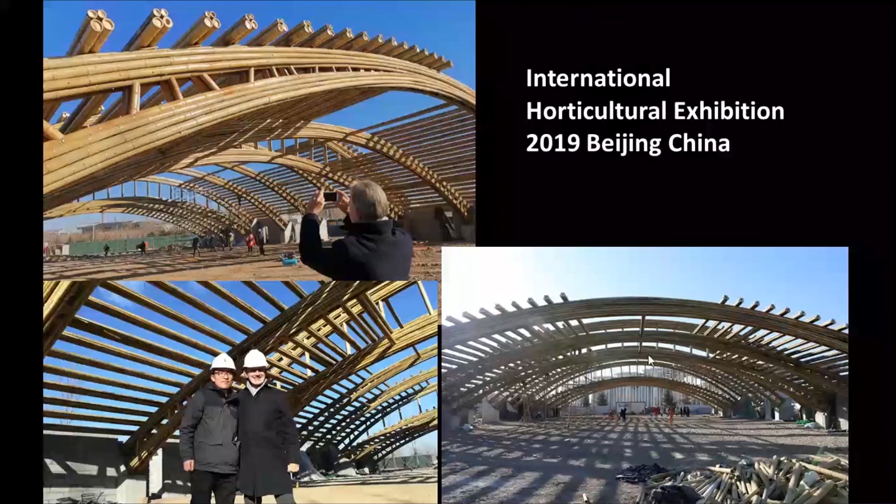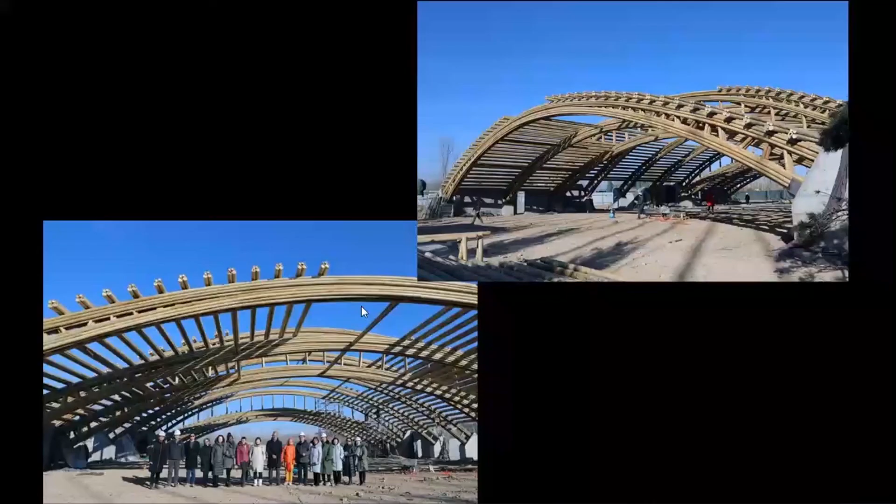One of the most interesting things I found about bamboo structures was the International Horticultural Exhibition in Beijing, China, which uses exactly the same philosophy for the structure. You can see the compression exactly - these arcs are in compression, and they use pads here and here, supported here, and after, you can see the final result. That's very nice.

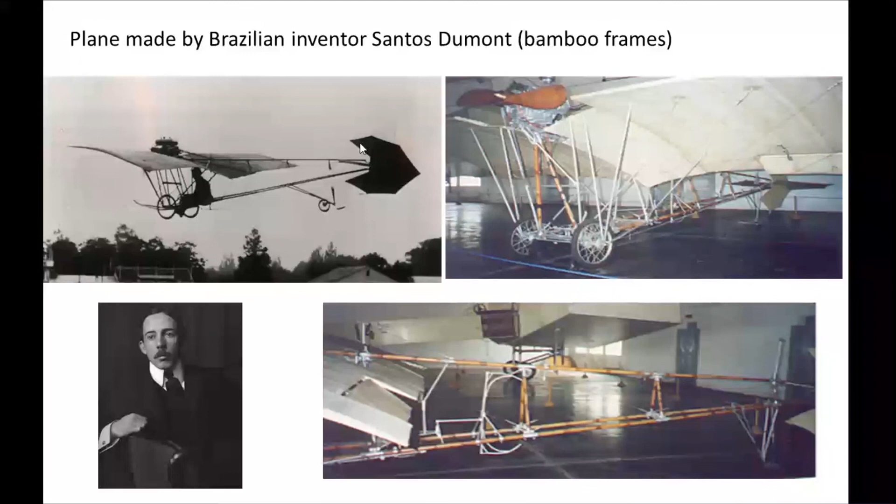Bamboo is edible and is very delicious. I personally prepare bamboo shoots for myself, for family, for friends, and you can use it. It's very delicious, and you can make many different dishes with bamboo shoots. You can vaporize it, or make something like bamboo fries, for example, and many different things.

Bamboo is also used in the cosmetic industry, and you can see the extractives of bamboo used for many different cosmetic things, shampoo, soap, something like that.

Also, bamboo is used in handicrafts. The Chinese and Japanese are very famous for this, and you can find different handicrafts from Japan, China, Korea, and Thailand, and different parts of Far East Asia, in fact. These are very nice and beautiful, and we also have many beautiful handicrafts in Brazil.

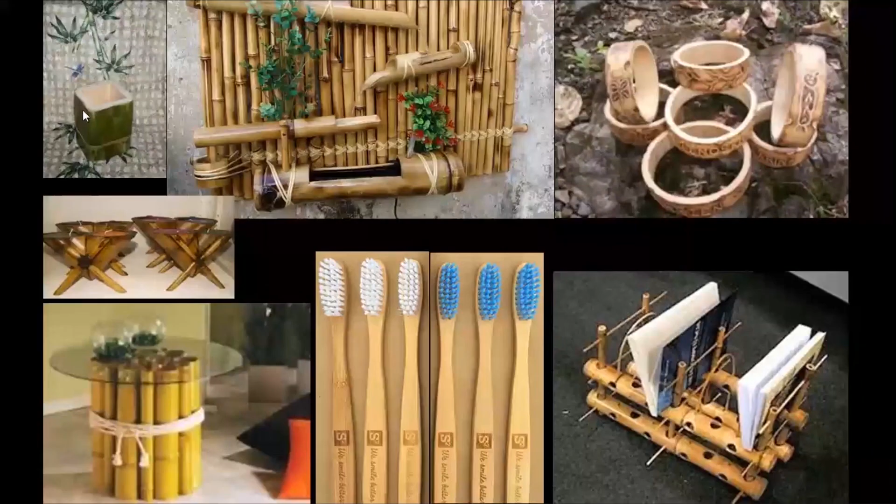For example, Bluetooth speakers - Marley is very famous and very expensive. They use laminated bamboo exactly to make one of the most expensive speakers, and it has good acoustic properties.